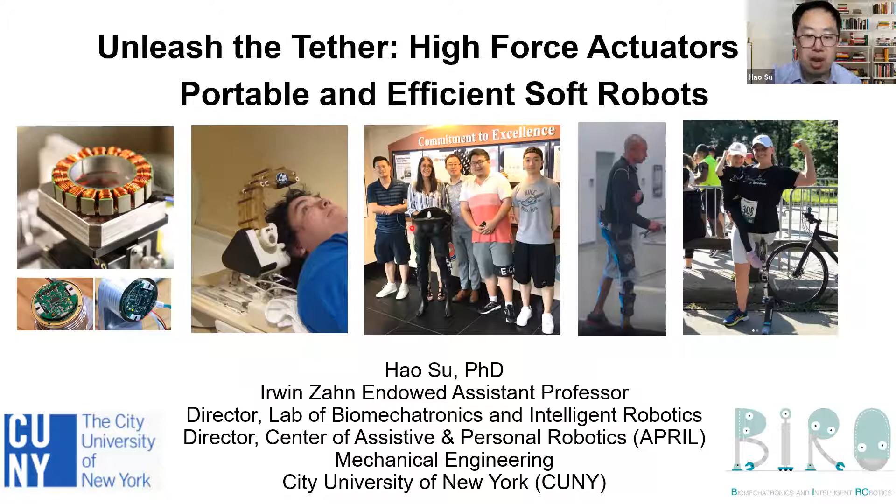Today, I would like to share with you our research that is at the intersection of robotics and medicine. Our lab focuses on design and control of high-performance robots with application in rehabilitation and surgery. This is a truly fascinating and emerging field that involves much fundamental research and exciting applications to solve real-world problems.

In the last decade, we have made significant progress in information technology. The smartphone is ubiquitous, which is the interface between the cyber world and the human. But there are limited systems that can deliver physical service. I envision robots will be the new interface between humans and the physical world to augment people for various tasks, from elderly care, manufacturing, to construction, disaster response, and many others.

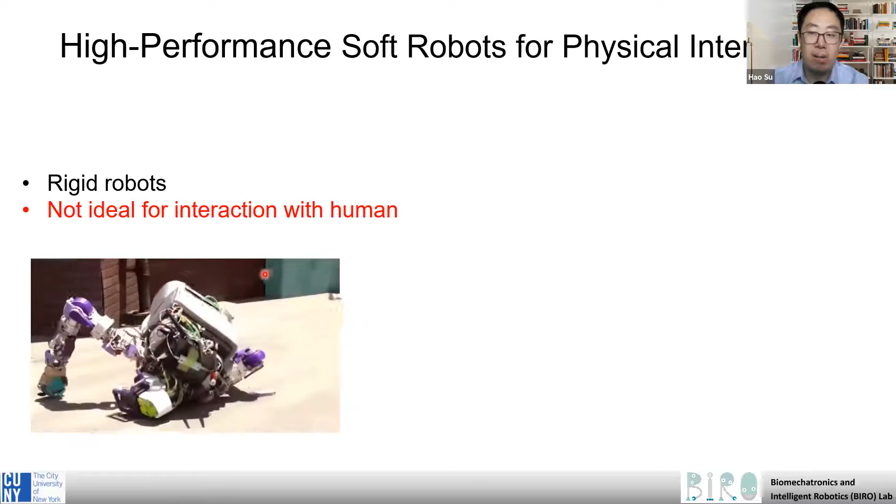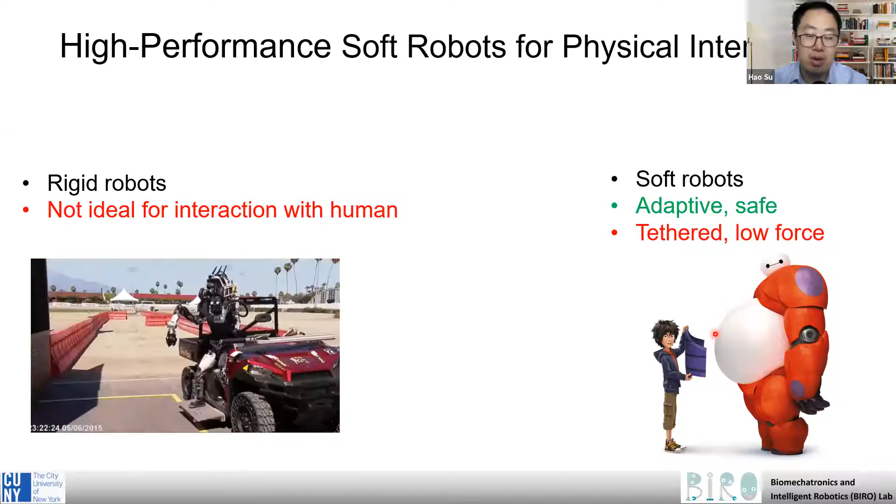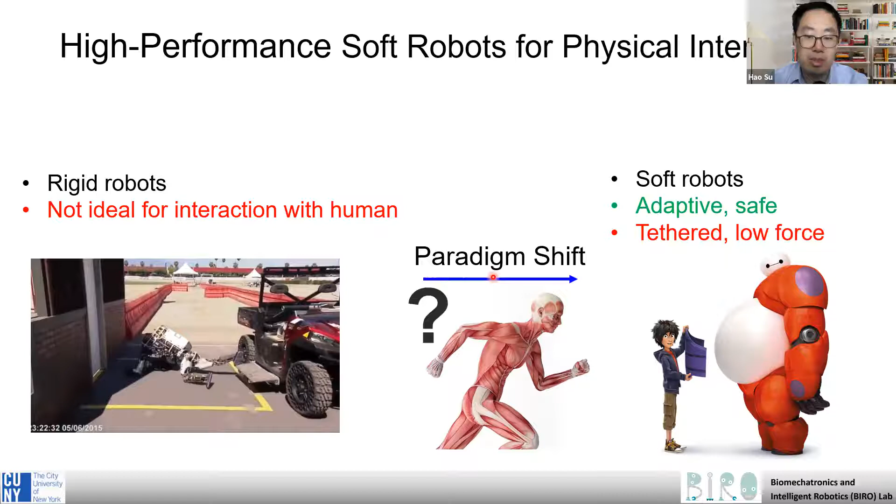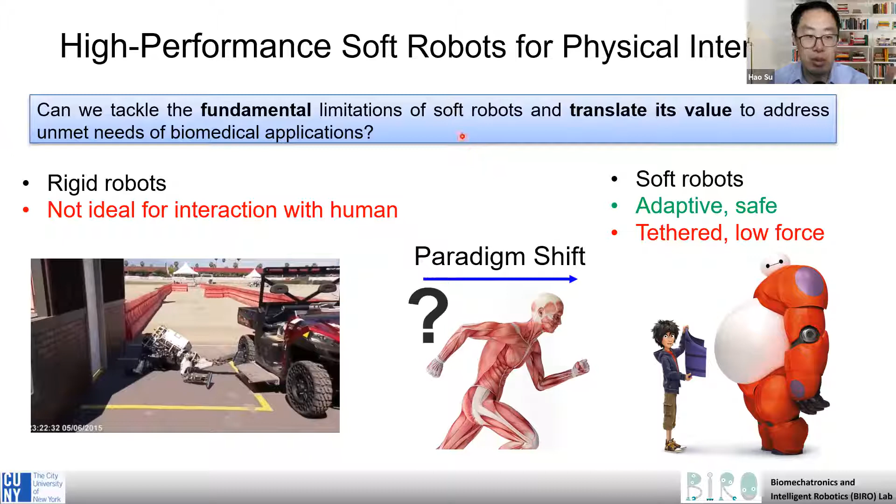State-of-the-art robotic systems are primarily rigid and operate on position control. They are highly precise, but terrible for physical interaction. Our research aims to design and control soft robots for physical collaboration with humans in ubiquitous settings. The question we are looking for answers to is what kind of design and control solutions can enable this paradigm shift? In particular, we are very interested in the fundamental limitations of robots, in particular soft robots, and how we can translate these technical innovations to address the unmet needs of biomedical applications.

Our multidisciplinary team is composed of talents from 4 research areas, including mechanical engineering, like Antonio, he's from University of Pisa, electrical engineering, control, and biomechanics. Our clinical collaborators are also leading experts in biomedical science. I also established the Center of Assistive and Personal Robotics, the APRIL Center, that is composed of 9 faculty from New York University, Rutgers University, and the University of Texas Medical Center.

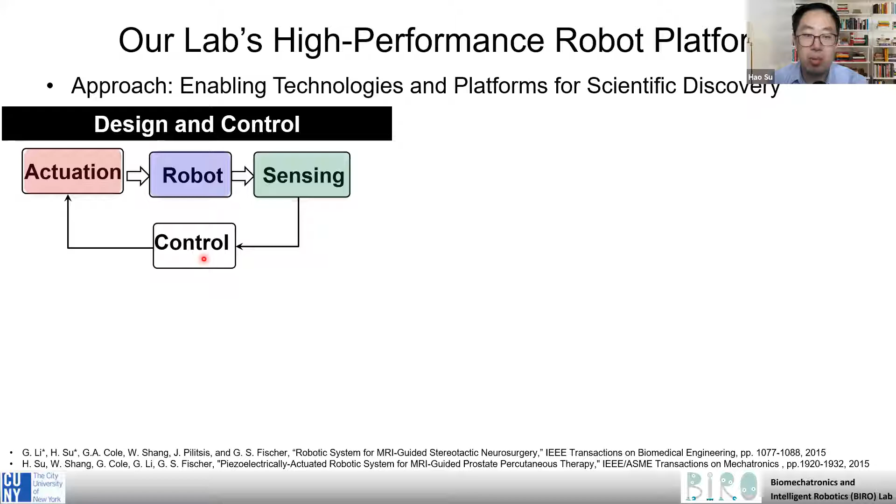In my lab, we focus on 2 domains. On the left, one domain is robotics, where we study design and control. Our approach is unique as we create component technologies like sensors and actuators. We also design robots from scratch, and then we develop controllers to embody intelligent robots. On the right, the other domain is scientific discovery. We use robots as a tool to address unmet needs in medicine, both in surgery and rehabilitation. We want to leverage robots to understand medicine and biology.

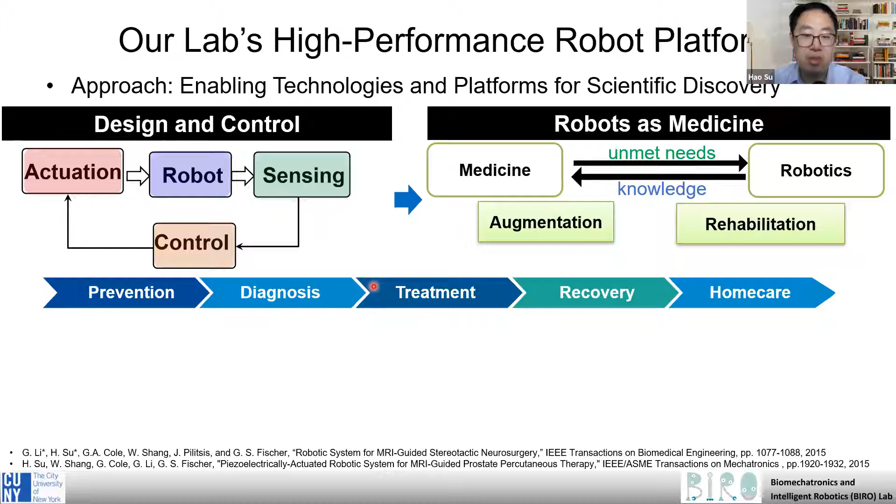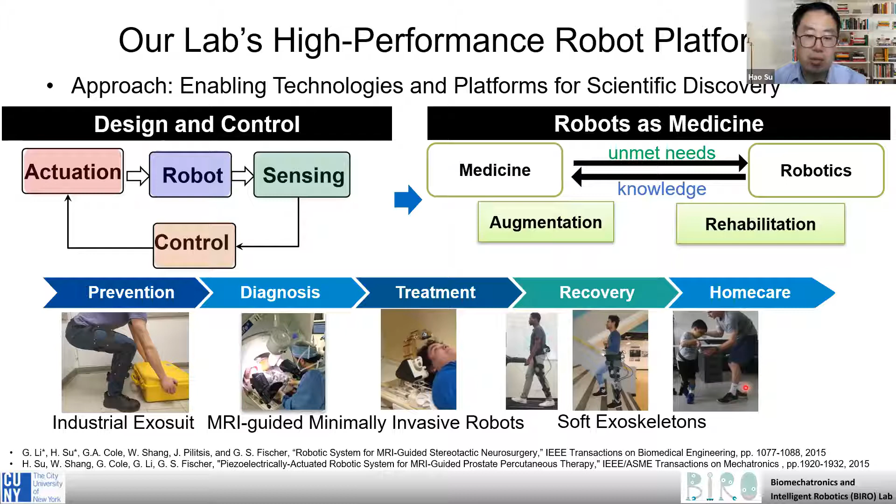In my lab, we have developed multiple high-performance robot platforms in the continuum of care, ranging from soft exosuits for musculoskeletal injury prevention to MRI-compatible minimally invasive surgical robots for cancer diagnosis and neurosurgical procedures. Those are essentially continuum concentric tube robots. In the last 4 years, we have been focusing on wearable robots for home-based rehabilitation with application in pediatric rehabilitation and also for musculoskeletal disorders like knee osteoarthritis.

Specifically, we have developed several key enabling technologies, including really lightweight motors, high-speed soft actuators and high-force soft actuators. Leveraging those components, we have designed what we think is the most lightweight powered exoskeleton, also with controllers to assist real-world locomotion. We believe that those innovations will enable a paradigm shift of assistive robots from clinic-based to home-based rehabilitation tools.

We have shown that our lightweight robot is able to significantly reduce energetics during human walking. In addition, we have some promising results to demonstrate that robots could be medicine, for example, to reduce pain of people with knee osteoarthritis and also improve mobility for children with cerebral palsy.

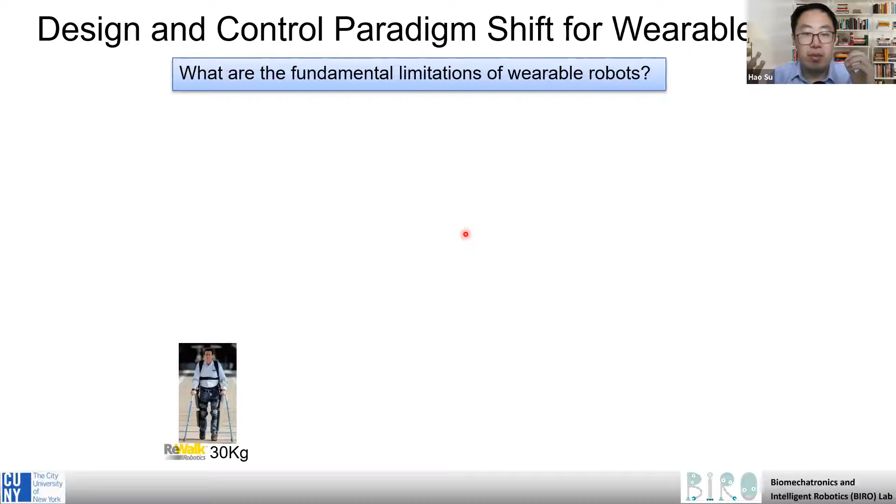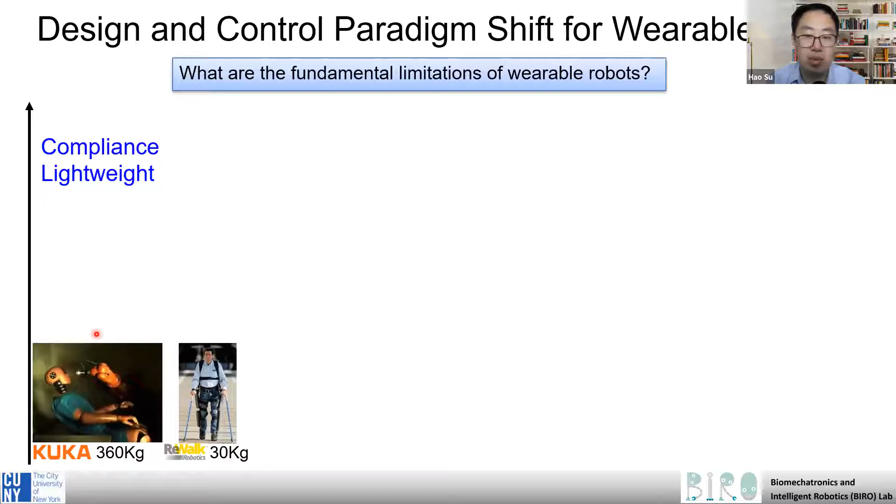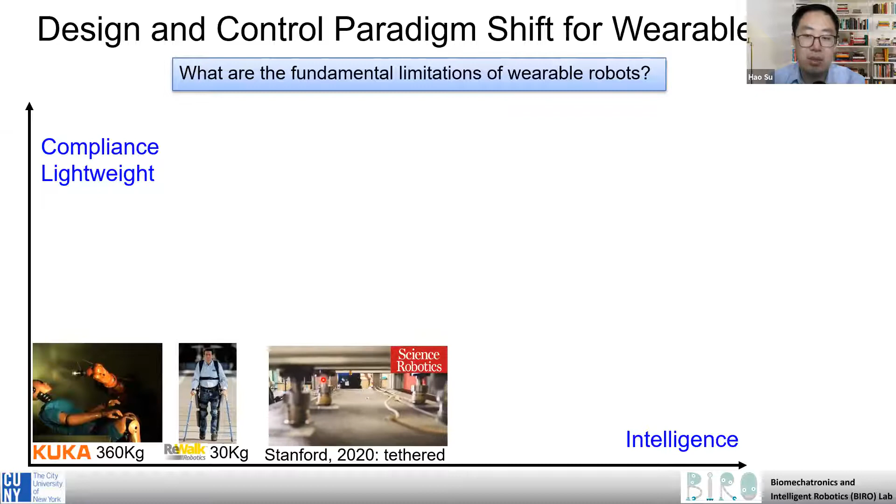Generally, if we observe robots through the lens of design and control, in terms of compliance and lightweight, the design approach of many state-of-the-art exoskeletons has no difference with industrial robots that are heavy, rigid, non-compliant, and even dangerous. In terms of intelligence, researchers developed wearable robots that can assist human running in addition to walking assistance. But many systems are still tethered and cannot be used for community settings.

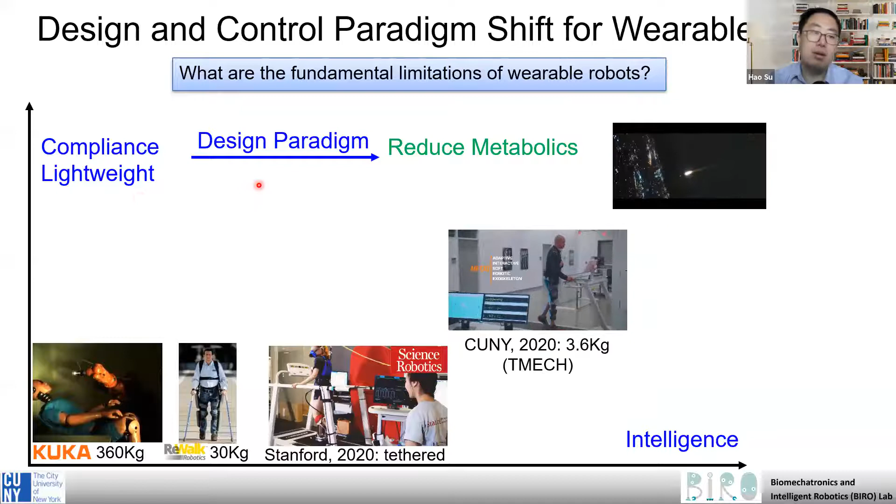In my lab, we aim to develop a really lightweight powered exoskeleton to minimize the mass penalty of wearable robots. We seek new design solutions to make a robot really lightweight and compliant. And the design objective is to reduce metabolics. Of course, for wearable robots, there are many other metrics in addition to metabolics, like muscle activities, but metabolics is certainly one key metric in this community.

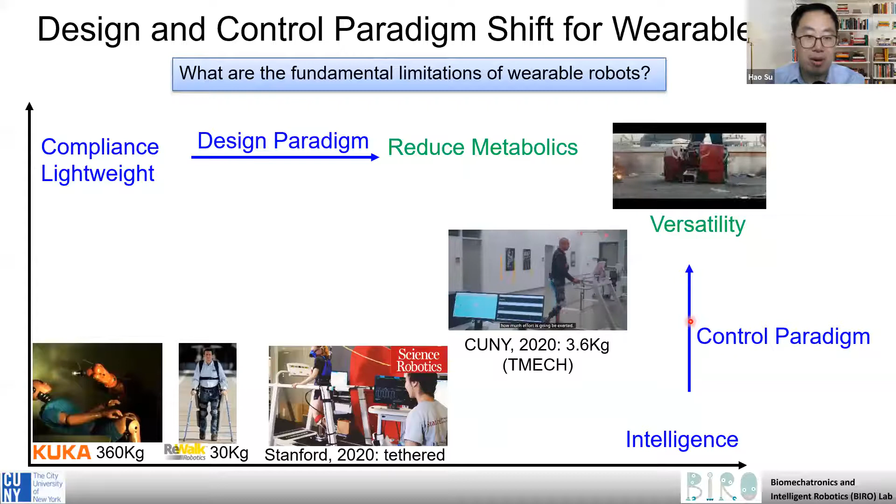If you look at the other dimension in terms of control, we want to develop controllers that can assist versatile activities. It's not only for walking, as many state-of-the-art robots focus on, but also for many other irregular gaits or irregular activities.

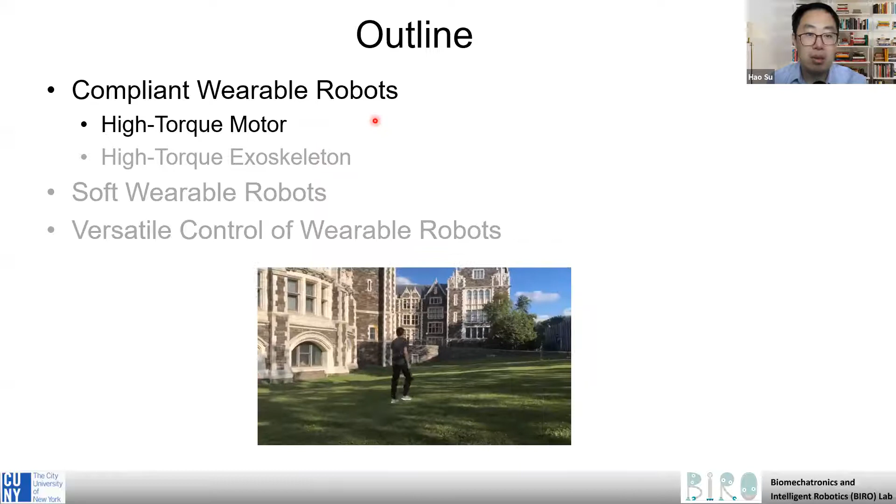In today's talk, I will cover 3 topics. The first one is a compliant robot, in particular, this untethered compliant wearable robot. Then I will present soft material wearable robots. For the third topic, I will share with you our control research, namely versatile controller for multimodal locomotion assistance. Let's start from the first topic about compliant wearable robots and why we want to work on these high torque motors and high torque exoskeletons.

Our robot development process always starts from understanding the unmet needs in medicine. In this case, it's biomechanics. Human locomotion is actually a complicated process that involves coordination of multiple limbs. As you can see from this diagram, the x-axis is a gait cycle from 0% to 100% of a single stride. The vertical axis is the ankle joint moment.

And you can see a unique feature is that human walking requires high torque. The ankle joint generates about 120 Newton meter torque in about 200 to 300 milliseconds. Even if we provide partial assistance, let's say 30% assistance, the actuator is required to generate about 40 Newton meter torque.

Right? If we look at the bottom right diagram, this is the torque speed profile of a human ankle joint, and the exoskeleton that provides partial assistance is located here, right? However, a conventional actuator typically can only produce about 0.5 Newton meter. So you can see the large discrepancy between the requirement and the motor performance. This is more than 100 times the capability of a conventional motor for wearable robot applications.

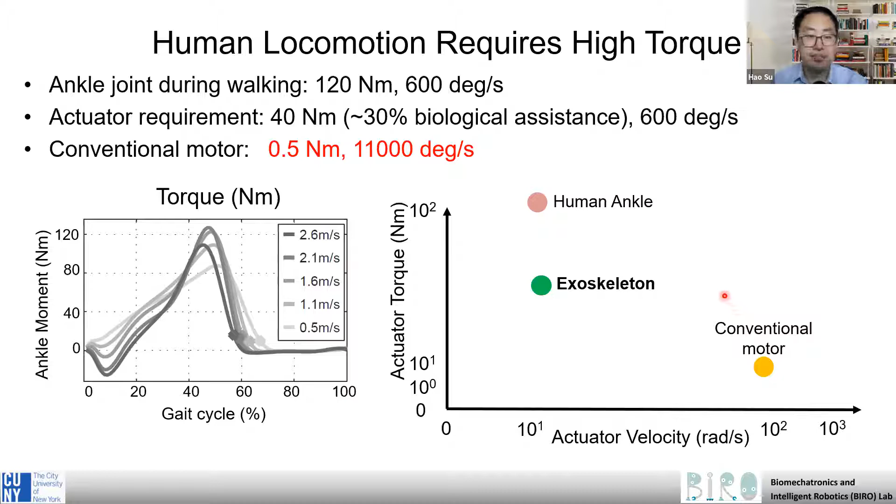So how can we tackle this problem? We follow a very interesting thinking philosophy. It's called first principle based thinking. Essentially, it's a physics way of looking at the world. You boil things down to the most fundamental truths so that we can tackle these fundamental limitations and tackle the overall problem.

For example, before we started the robot development, I asked ourselves, what are the first principles that limit the performance of wearable robots? If you look at the anatomy of a powered exoskeleton, it's composed of a motor, gear, typically high ratio gears, and wearable structure. And those high ratio gears, typically around 200 to 1 or 300 to 1 gear ratio, result in high friction and high inertia of the robot. Thus, most wearable robots are actually resistive to natural movement, in particular when unpowered.

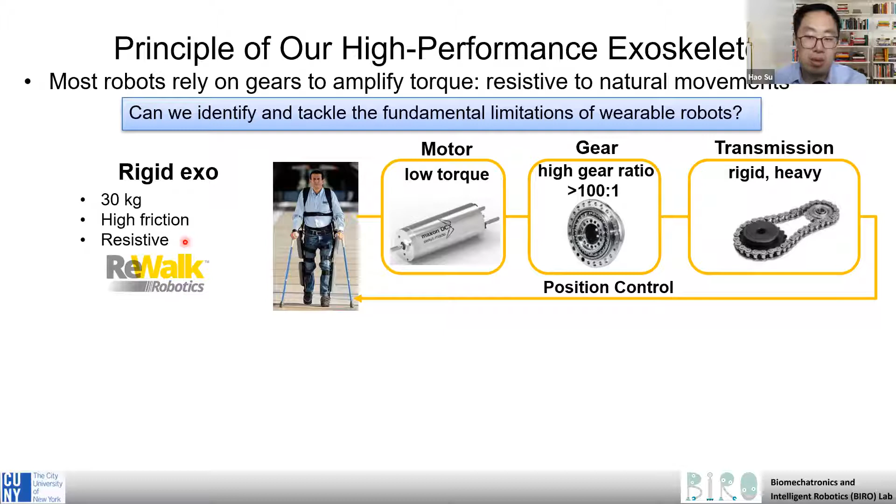Our exoskeleton aims to make the robot not only lightweight, but also compliant and truly assistive to human movement. We have a holistic solution from high torque motor to low ratio gear and different transmission mechanisms, from rigid transmission to soft transmission.

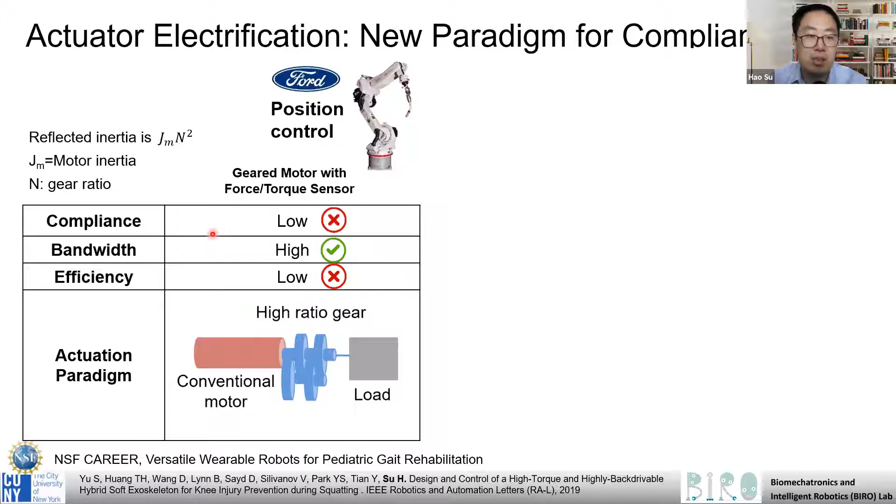Similar to the revolution in the automotive industry, my lab has been working on actuator electrification research for robots. If you look at the 3 metrics to quantify collaborative robots, including compliance, bandwidth, and efficiency, conventional actuators have high bandwidth, but are very rigid and suffer from low efficiency and low compliance. Series elastic actuator is still kind of the state-of-the-art solution; it can improve compliance by the addition of a mechanical spring between transmission and the load, right? But it has mediocre bandwidth and efficiency.

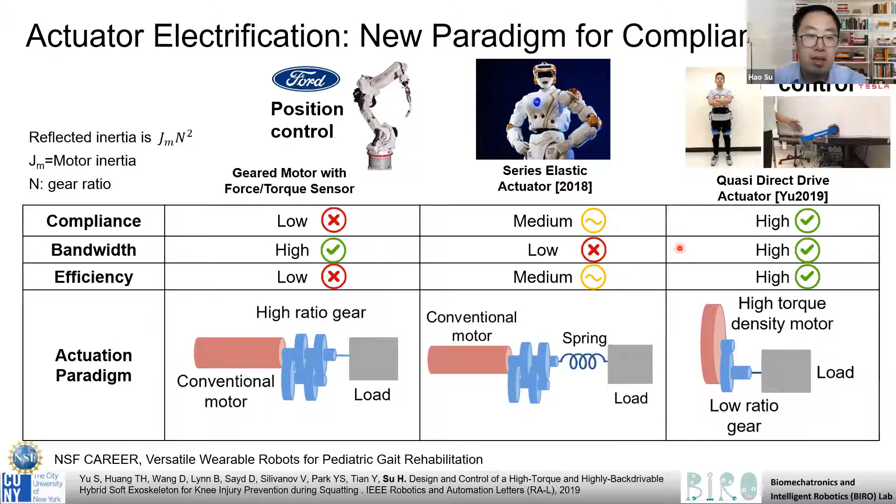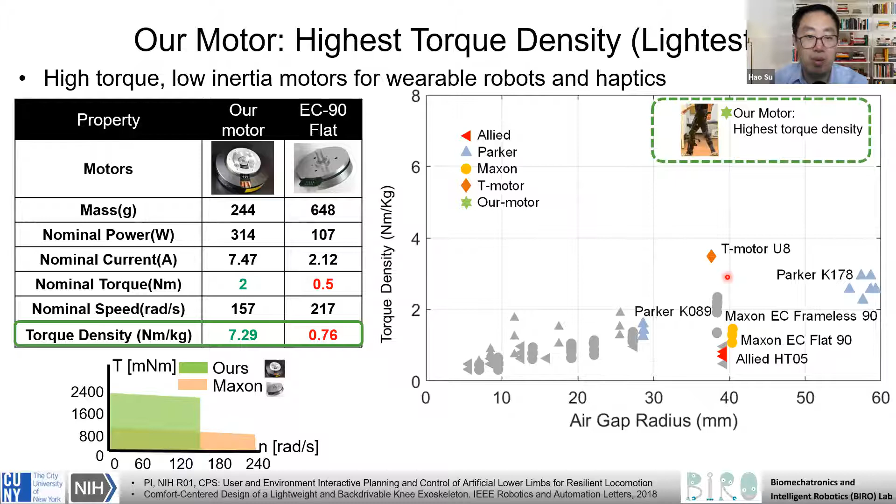As shown in the bottom left figure, our motor is more similar to human motion characteristics, higher torque and lower speed. It generates large torque and relatively lower speed. If you look at the diagram on the right, our motor not only has better performance than conventional Maxon motors, but also has higher torque density than some of those drone motors. For example, this T-Motor has been used widely for robots by MIT and many other groups.

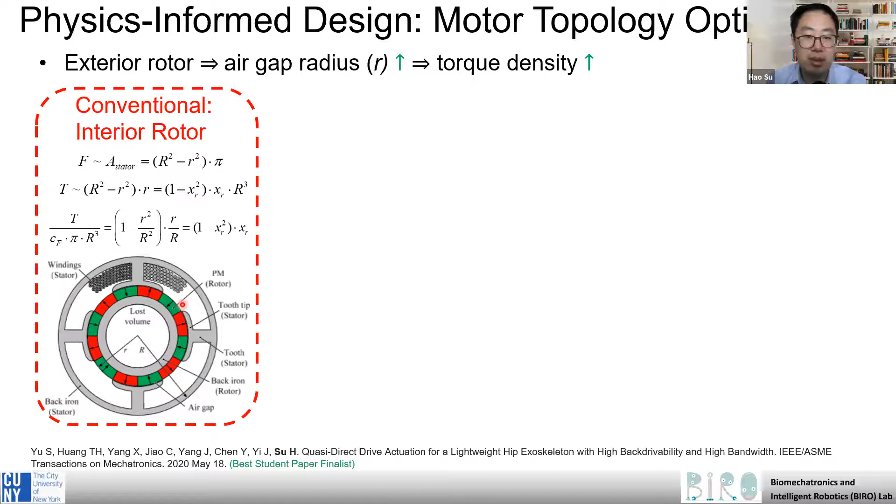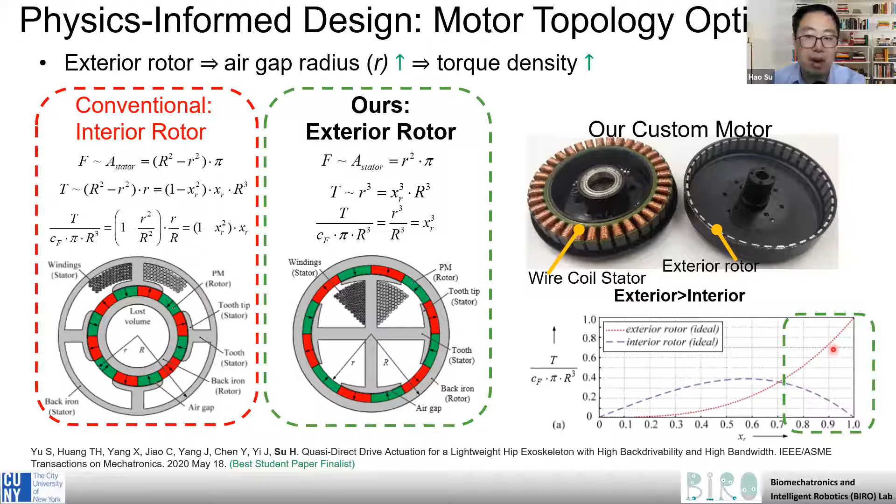To achieve those performances, we developed 2 physics-informed design methods. The first method is motor topology optimization. Instead of a conventional motor that is based on interior rotor design, we create an exterior rotor topology, shown as this colored circle. If you look at the diagram on the bottom right, this exterior rotor topology can produce a higher torque density than interior rotor design.

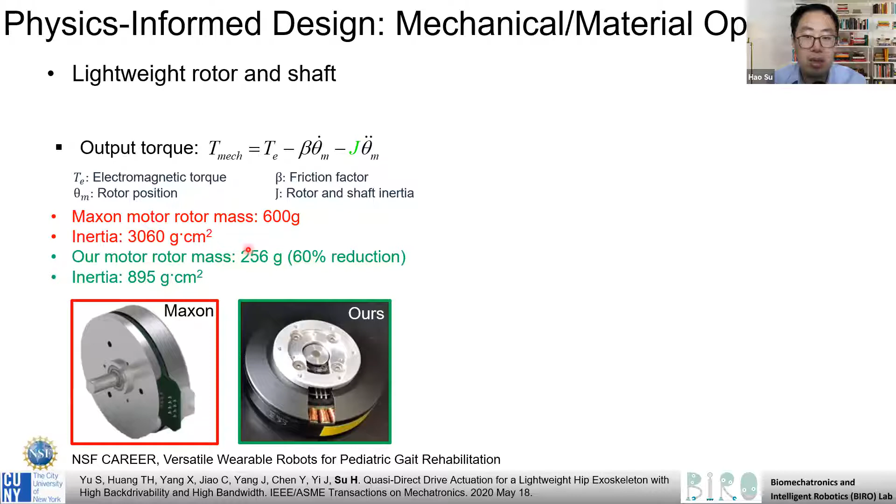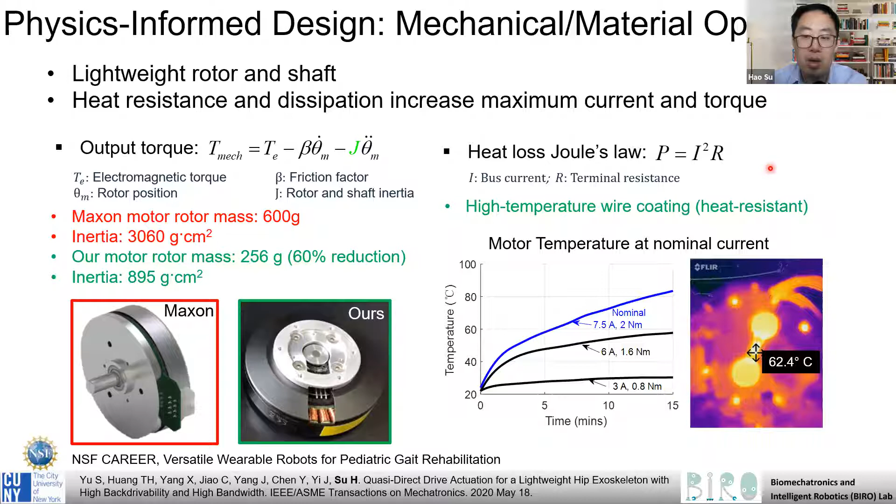The second method we developed is mechanical and material optimization. We are able to reduce the rotor mass by 60%. In addition, we also figured out some high temperature wire coating methods, so the motor can operate at the nominal torque while the highest temperature is still fairly low.

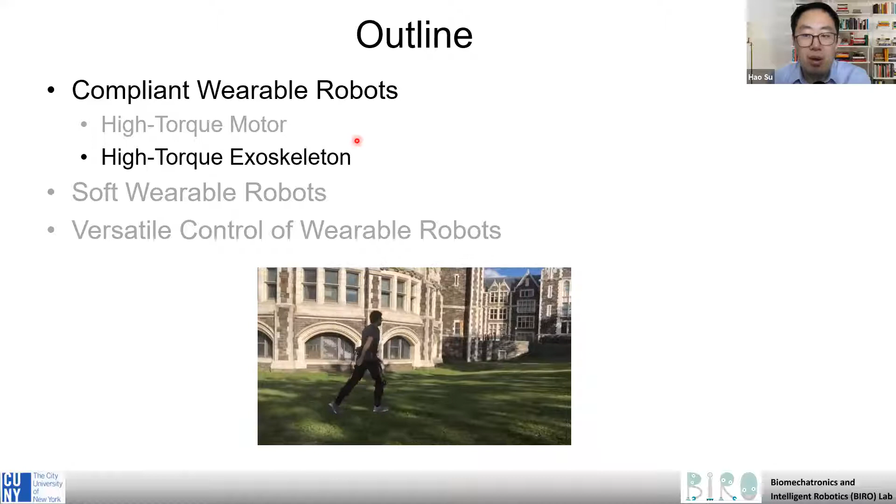In addition to the first principle based motor design, we also leverage mechanical design to develop a lightweight robot. Our robot is lightweight not only because of the high torque density motor, which is essentially a lightweight motor, but also because of the simple mechanical design. If you recall the slides about SEA, series elastic actuator, to add the spring it requires a very complicated mechanical structure. So the overall system is complicated and in general heavy and bulky.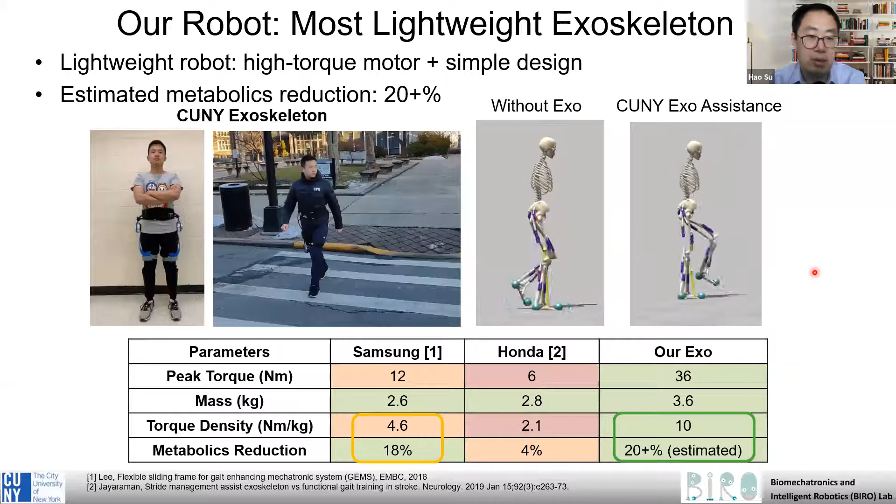In addition to this portable robot, we also designed some tethered robots to further minimize the wearable mass, right? We can isolate the actuator from the person, so the person only needs to bear the mass of the wearable structure. Because if the robot is too heavy, it significantly increases the metabolic penalty to the person. This is a robot from Humotech. It's a tethered system, a spin-off company from Carnegie Mellon University. They are based on an AC motor, and the wearable structure is heavy, about 7 kilograms for one hip exoskeleton. And they can generate a really significant amount of torque to a person.

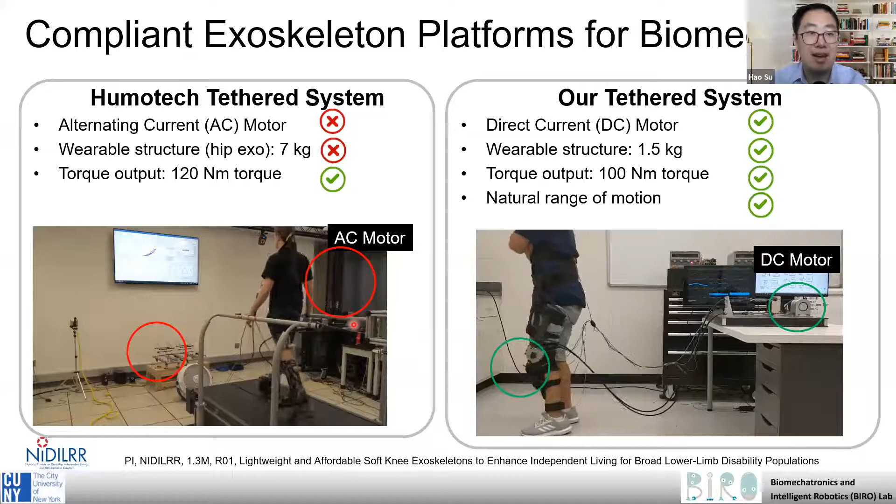In our design approach, we want to use a DC motor because it's much smaller and much more affordable. And the wearable structure we designed is also pretty lightweight, about 1.5 kilograms. Though our torque is slightly less, it can already generate more than 80% of torque for most tasks. One key feature is that this robot still allows natural range of motion, because some tethered exoskeletons don't really allow the natural range of motion for movements like squatting or stair climbing.

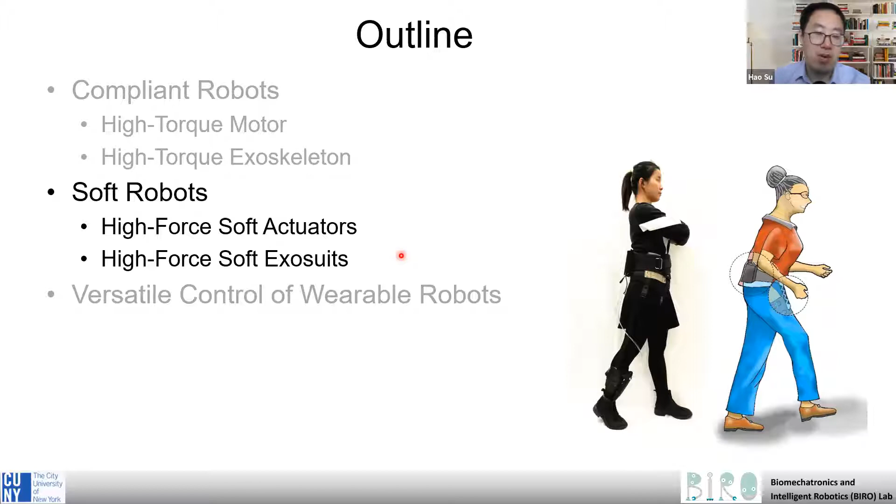In addition to these compliant robots, which you can see are structure-based soft robots, right, we also work on soft material robots through soft actuator design to achieve high force, and we also developed soft exosuits with high force in an untethered manner. The previous robots I just presented are compliant, but their materials are not soft.

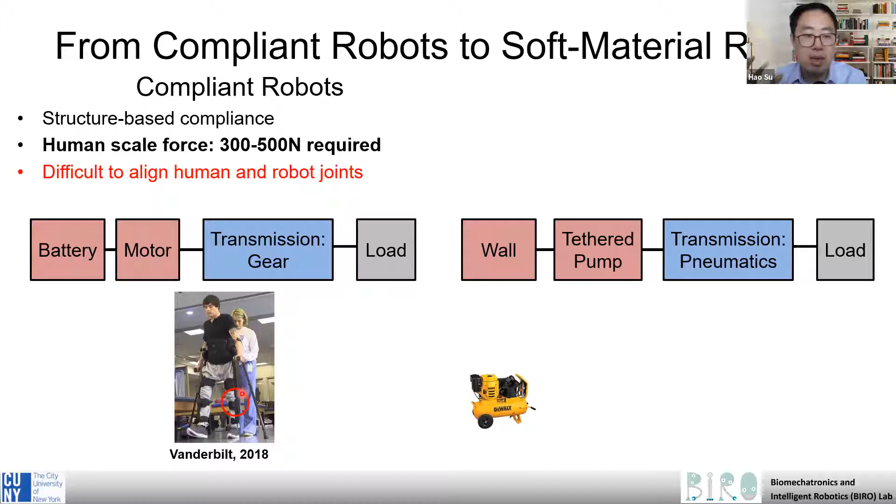It still has rigid joints that cause misalignment issues between human and robot, as shown here, right? So joint misalignment is a key limitation of rigid wearable robots. Soft material robots that use soft materials like rubber and fabric are very suitable for wearable applications because there's no joint for those robots. So there's no joint misalignment issue as with a rigid robot.

But fluid-driven soft robots typically have low forces, and they require a heavy tethered pump to generate the fluid. Actually, from a mechanical design perspective, if we think about the energy transmission from a tethered pump to a pneumatics mechanism, I consider pneumatics a transmission, and this pump is actually a very important component of the actuator because it converts electrical energy to mechanical energy, right? So this pump is actually a very important component of the actuator.

From this perspective, we consider motor and pump limitations, not only the pneumatics or hydraulics structure itself. Because many fluid-driven soft robots are tethered, to unleash the tether, the key objective is to design high torque density and high efficiency robot components. Our method is actuator electrification for soft robots, in this case, soft material robots.

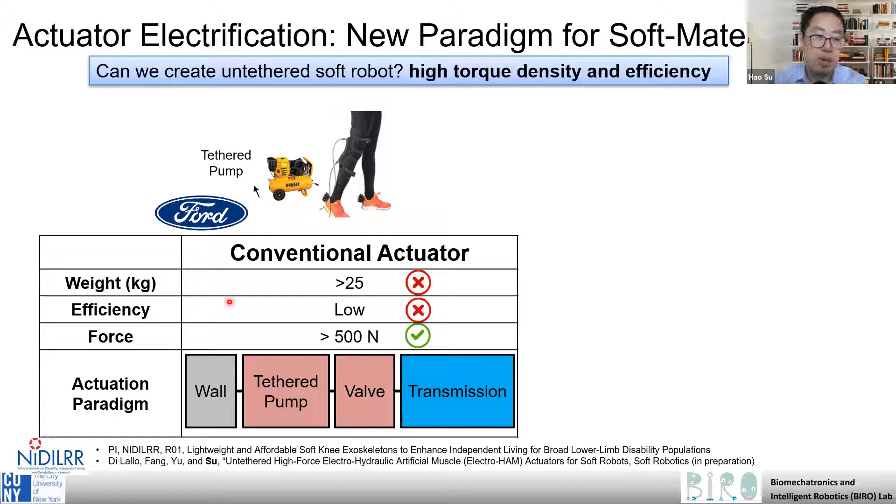When we started our design process, it really puzzled me whether it's possible to generate human scale forces in a portable manner, right? For example, for wearable robots, if you think about the exoskeleton, it requires at least around 300 Newton to 500 Newton force. That's really a significant amount of energy from this actuator.

In the last 3 years, we figured out an electro-hydraulic solution. We need to design and customize a lot of mechatronic components, including motors, magnetic pumps, and electronics, to enable this electro-hydraulic actuator solution. To convert motor motion to fluid actuation, the pump is very important. To improve the system efficiency, we developed some custom pumps.

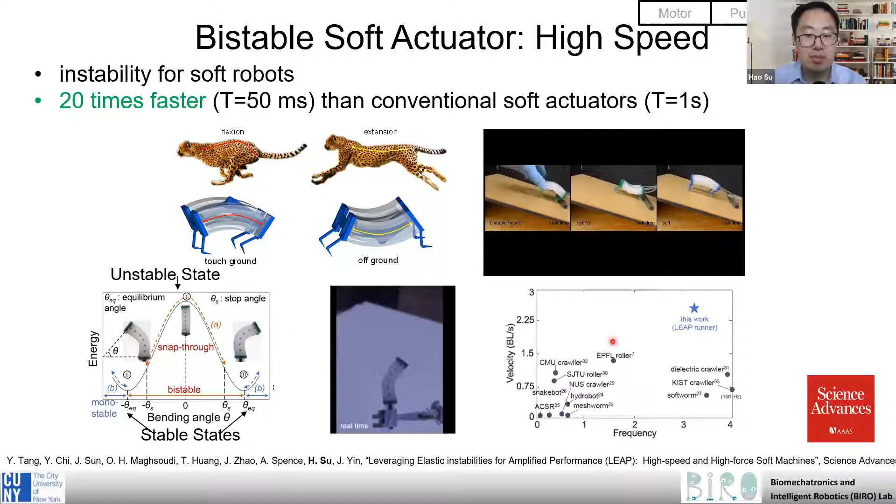And you can see from the bottom figure here, the robot has two stable states and one unstable state. It leverages this nonlinear phenomenon to rapidly switch between two states. The robot is able to amplify the actuation speed by 20 times compared to conventional actuators, and it produces a high-speed running or crawling soft robot. The same principle can also be used to design high-speed underwater robots.

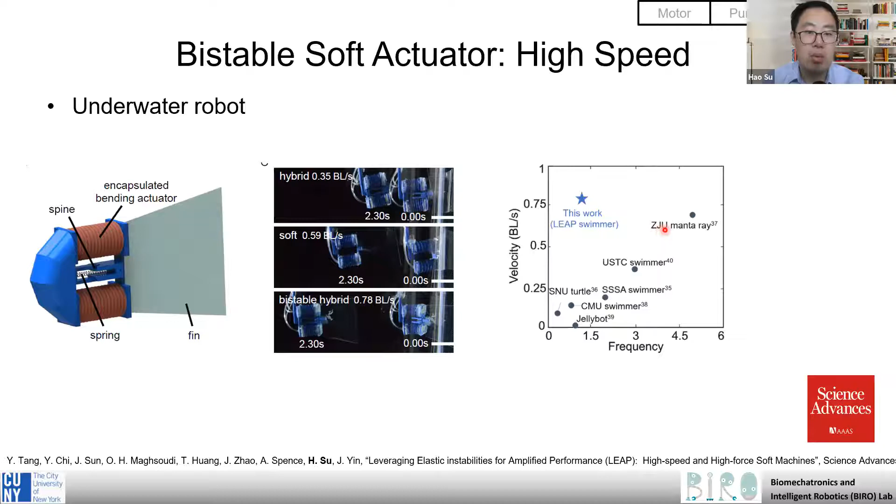And the stiffness can be modulated to high stiffness to grasp heavy objects, or low stiffness to handle fragile objects. It's very suitable for manufacturing and assembly applications.

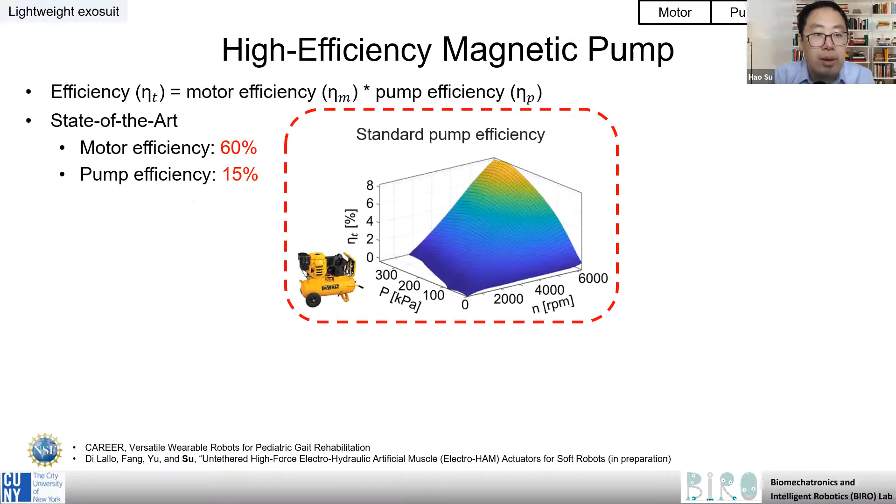Yes, please. So you say that 500 Newton is required in the couple of slides before. I didn't understand how it was calculated or how it is a target. The second one is, in the pneumatic actuation, you showed the air pump, but maybe I missed that point. You're eliminating the air pump source and then using the magnetic pump for the pneumatic systems, or if I understood wrong? Yeah, those are two really good questions.

I think the torque requirement, right? If you think about the lower limb, there are 3 joints: hip joint, knee joint, and ankle. Overall, the ankle joint has the highest torque requirement, at least about 100 Newton meters. We provide partial assistance, because full 100% assistance is more for people who are fully paralyzed. In our case, many people, like people with stroke or knee musculoskeletal disorders, only require partial assistance. So 100% assistance is too heavy.

So if you calculate the torque, let's say 100 Newton meters multiplied by 30%, it's at least 30 Newton meters. But this is a range; some people want to assist 50%, and it depends on different joints and percentages. Take the ankle at 30 Newton meters and divide it by the moment arm. Actually, ankle exoskeletons from several universities using the cable solution generate 700 Newton. So if you want to provide lower level assistance, I think it's around at least 300.

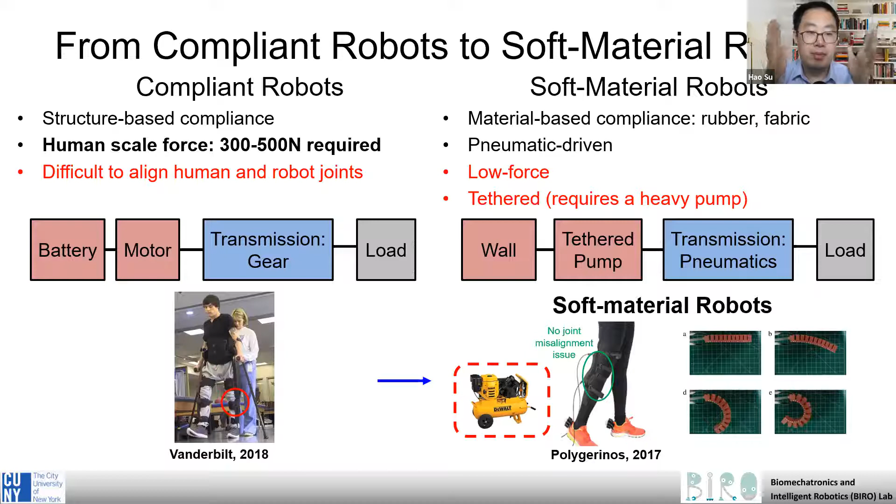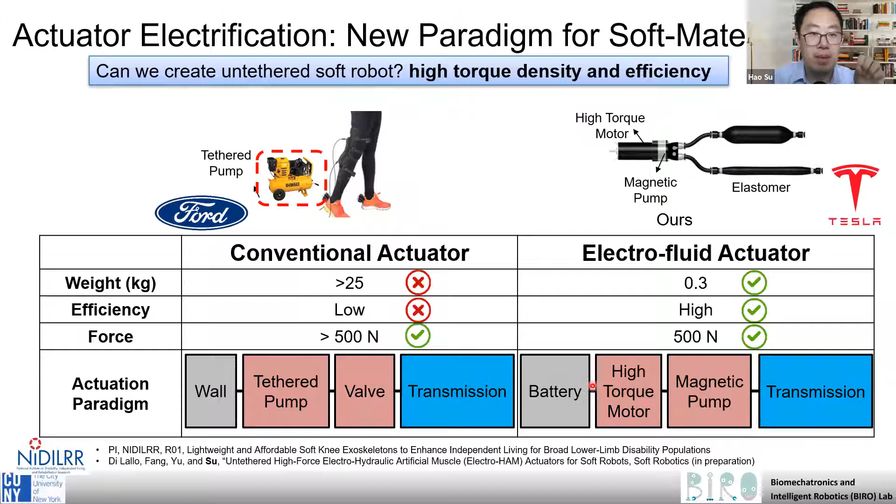As for the second question, that's also a really good question. We want to be different from the first solution based on a tethered pump. We want to get rid of this big pump, and we don't connect the tether to a wall. It's battery operated, and based on this motor and magnetic pump system. This is the system structure, roughly as you can see from this diagram, so it's a compact solution.

Yes, and you also use it for hydraulic actuation, because researchers usually don't prefer hydraulics, since conventional hydraulic systems create problems with high forces, maintenance and so on, from literature surveys. So you also solve this problem, I think. Certainly. Pneumatics and hydraulics both have pros and cons. And I think the unique opportunity for general fluid-driven robots for wearable applications is here, because if we think about high force, right?

Actually, it's not very difficult to design some high force actuator, right? Like this from Professor Suzumori's lab. It's really a nice, very cool hydraulic actuator, right? But for this portable application, this presents some unique challenge, but also unique opportunity, right? And I think in this space, it has a high force, but also to make that portable, it's really something pretty unique, right?

Because, for example, this one is also a famous robot from University of Colorado, right? But generally, it's a little bit kind of like a low force end. It's not really designed for wearable application. For this grasping, this kind of actuator is good. But for exoskeleton, this is really a big challenge. Even for us, it's very, very difficult to design a high force and portable actuator.

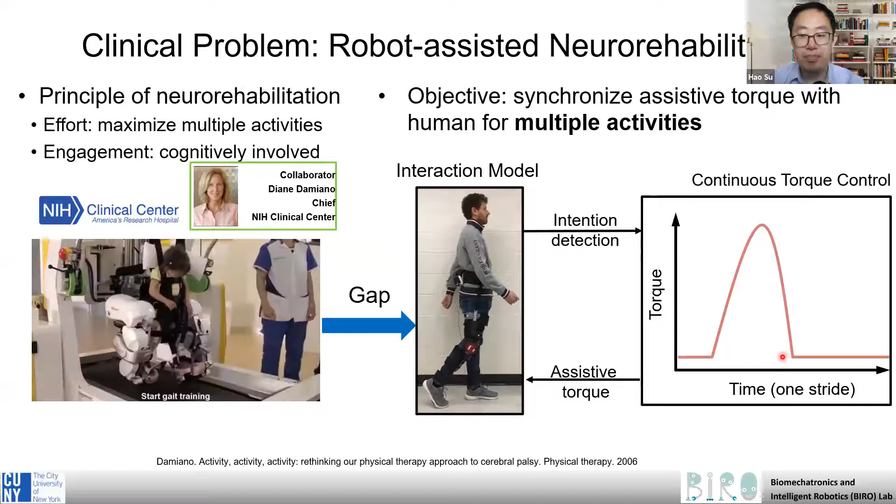Our design objective for the controller is to develop synchronized assistive torque with the human for multiple activities. For a single joint, we want to come up with a torque assistance profile that can really synchronize with the human activities. To this end, we have two tasks. The first is to model the human-robot interaction and to understand the robot's impact on the human. The second is to figure out this torque profile. We developed a unified model that can capture the dynamics of motor, transmission, and wearable structure. From this dynamic model, we are able to understand the property of different actuation paradigms.

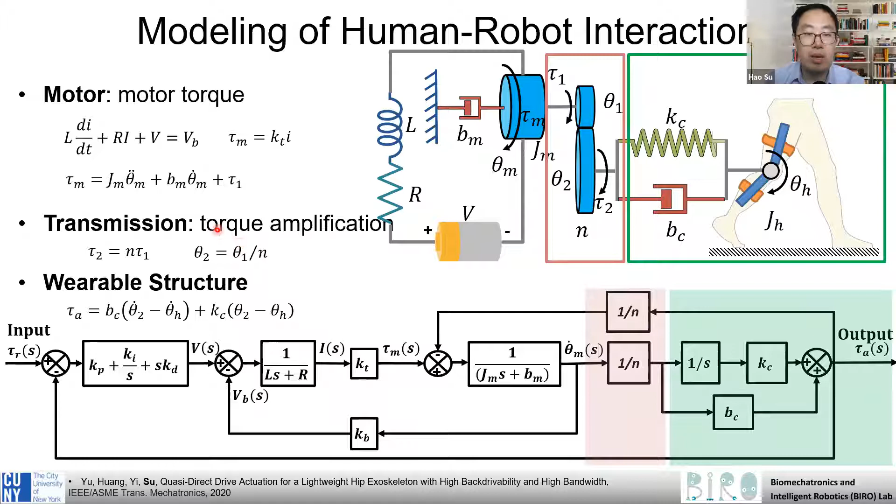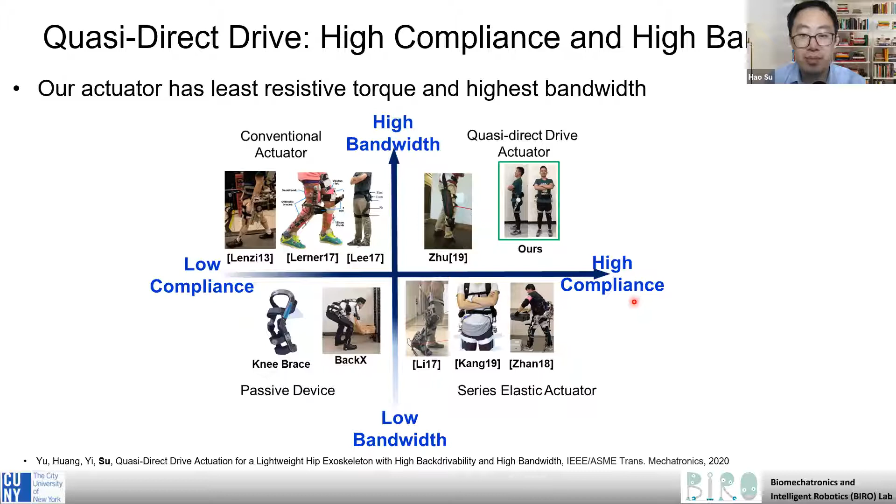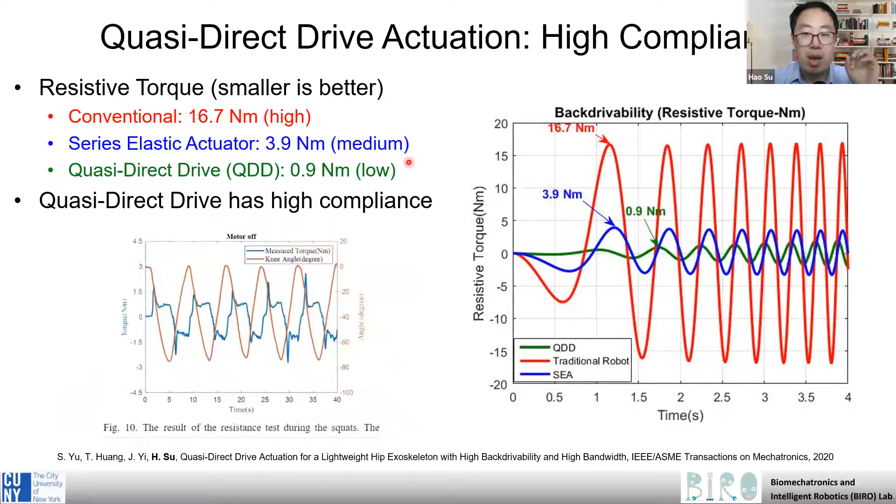From this modeling and experiments, we found that our actuator has both high compliance and high bandwidth. In this case, I'm talking about the quasi-direct drive actuation, to achieve high bandwidth and high compliance. From both simulation and experiment, we found that the quasi-direct drive actuator is able to overcome the limitation of conventional actuators and the series elastic actuator. The QDD actuator demonstrated high compliance. Using the QDD actuator, we also designed a cable-driven, kind of soft robot actuation, and it also has high compliance.

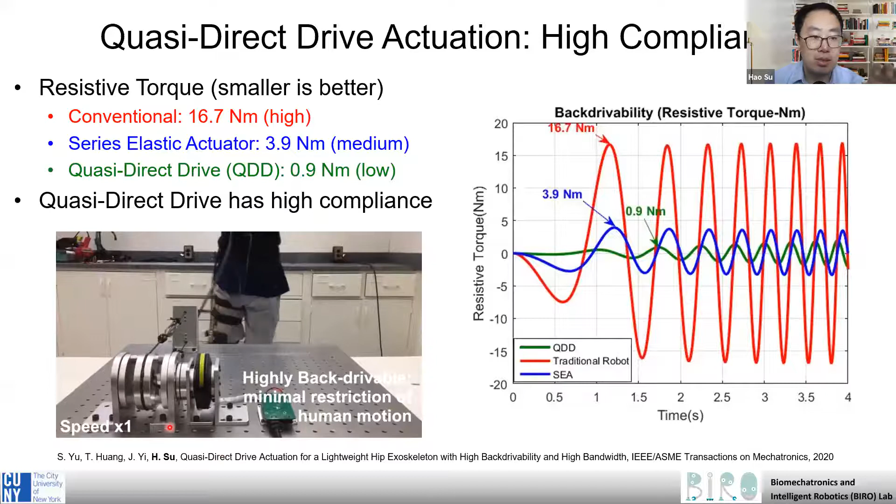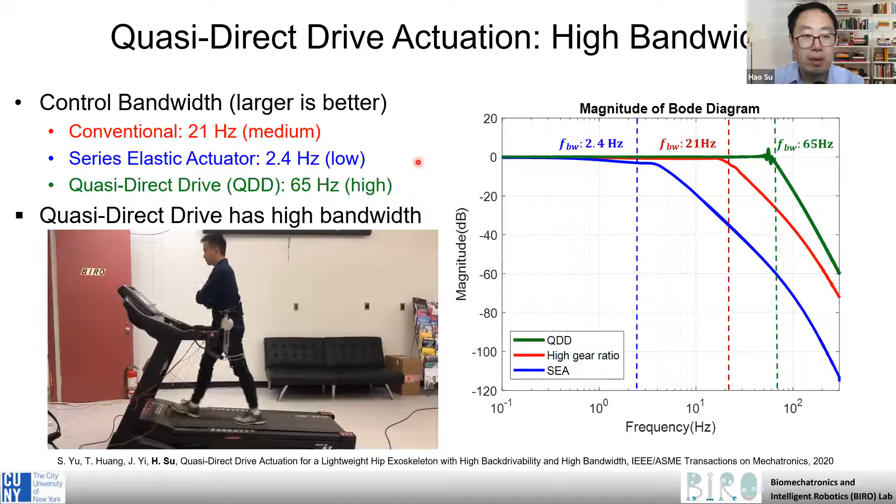In terms of bandwidth, we found that the series elastic actuator has to compromise the bandwidth to ensure compliance because of the spring mechanism, while quasi-direct drive is superior in terms of bandwidth. High bandwidth makes wearable robots more responsive and capable of handling unexpected events. So quasi-direct drive actuation really can ensure both high bandwidth and high compliance. Our cable-driven quasi-direct drive actuator achieved really good tracking accuracy, and we also showed that we can reduce about 75% of muscle activities during squatting.

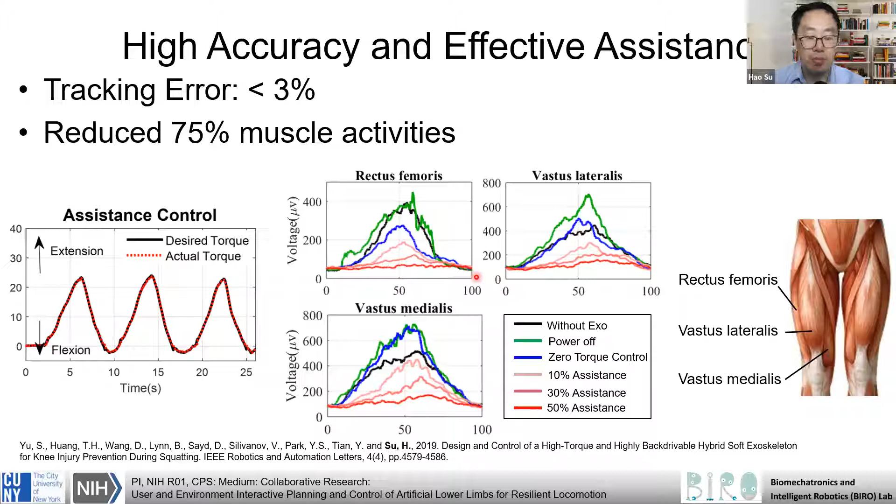When we think about how to use those robots, many wearable robots are designed for neurological disorders like spinal cord injury and stroke, because those individuals generally have more severe gait impairments and are more willing to tolerate the mass penalty of wearable robots. We have been working on different applications, like musculoskeletal disorders, like knee osteoarthritis.

The idea is to reduce the loading to relieve pain for people with knee osteoarthritis. We have obtained some very promising results, reducing about 80% of pain in 6 subjects. Their pain scale has been reduced from 9 to 1 to 2. So the smaller the better. We also showed that we can reduce the muscle activities of people during walking.

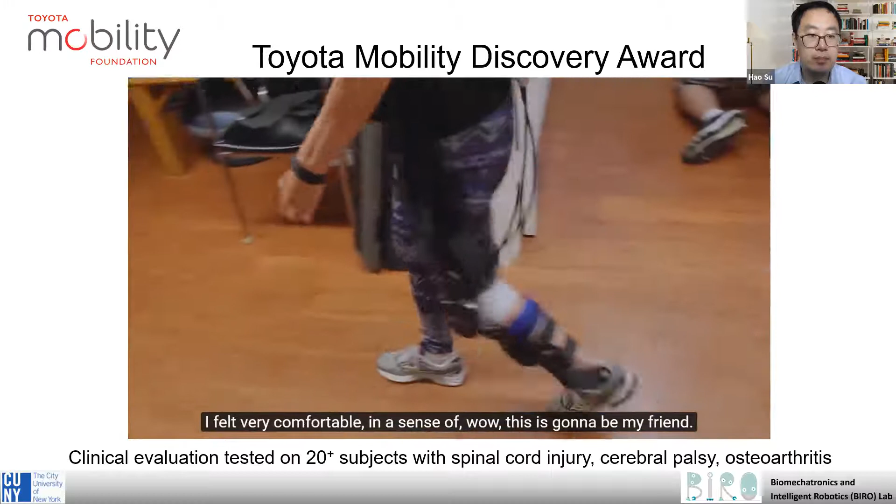Our team also won this Toyota Mobility Discovery Award using this cable-driven soft robot. Put this on, it actually helped me. I felt that I had more stability, it helped my balance, and my gait went very natural. I felt very comfortable in the sense of, wow, this is going to be my friend.

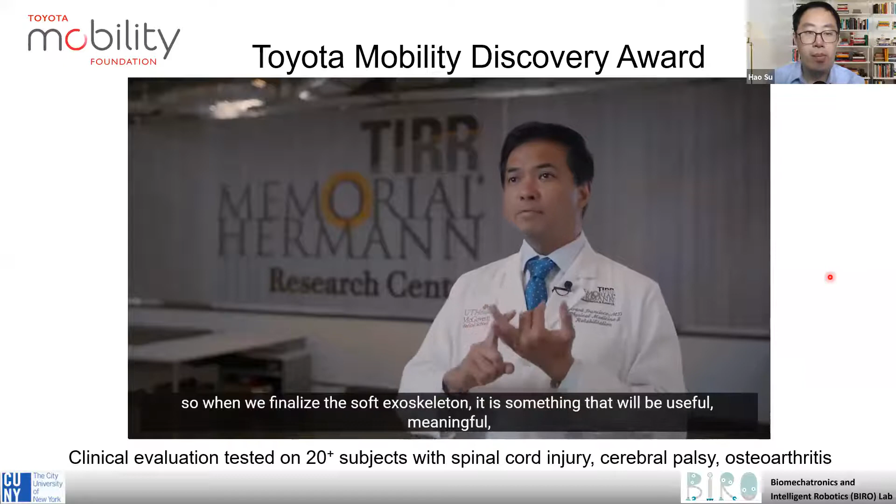I love it. It took about a minute because it's pretty easy. I'm walking a lot lighter. It's very low profile. I don't hear noise when I'm walking. Everyday use, this is perfect. They have to tell us what they need. They have to tell us what they want, so that when we finalize the soft exoskeleton, it is something that will be useful, meaningful, something that will help them in their recovery and their activities of daily living.

Another aspect of controller design is to develop continuous control methods. This continuous controller is important for wearable robot control, because if you look at this state-of-the-art controller, it uses a predefined piecewise torque profile. The x-axis is joint angle. The y-axis is torque. The torque profile is not smooth and susceptible to varying gaits.

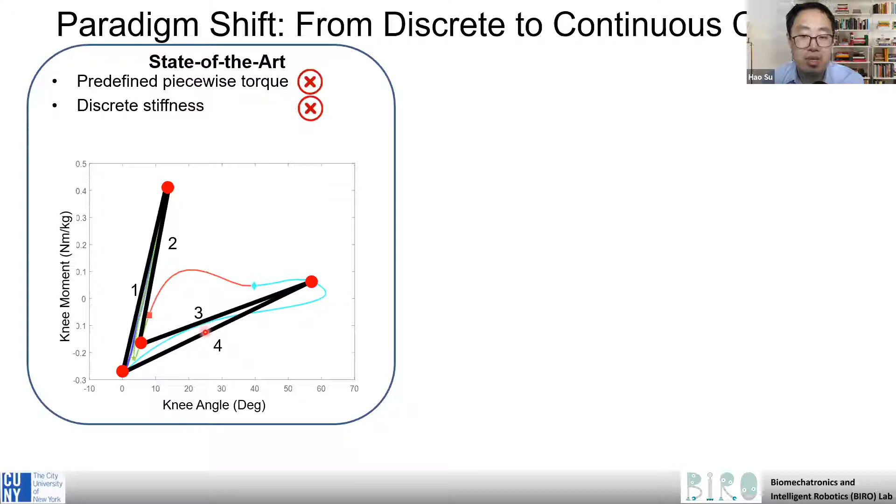And also there's no one-to-one mapping between joint kinematics and joint torque. So it has to rely on discrete gait detection, like finite state machine methods and discrete torque control. Our method is based on continuous detection of gait that produces a more robust and smoother assistive torque profile. In addition, it is able to produce one-to-one mapping between kinematics and estimated joint torque.

For a data set of 23 people, we figured out how to handle that massive data, as biomechanics produces a lot of data, including walking at different speeds, gait cycle, and many kinematic data, including joint angle, angular velocity, and joint torques.

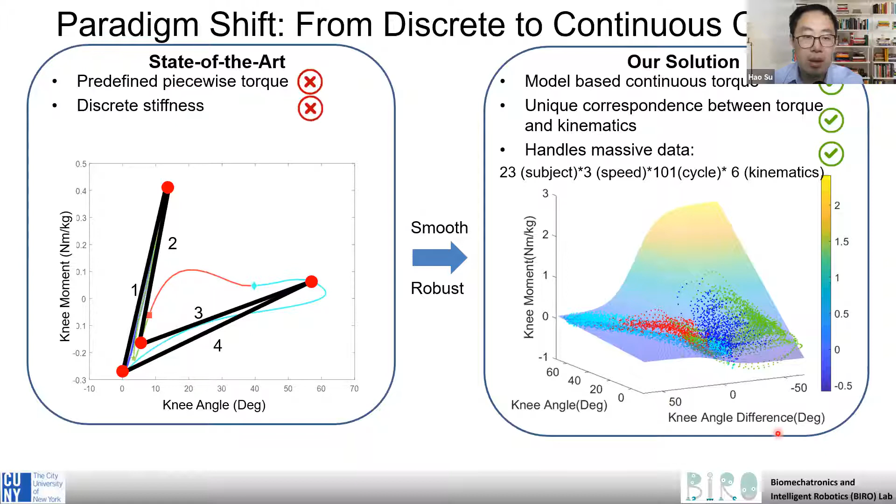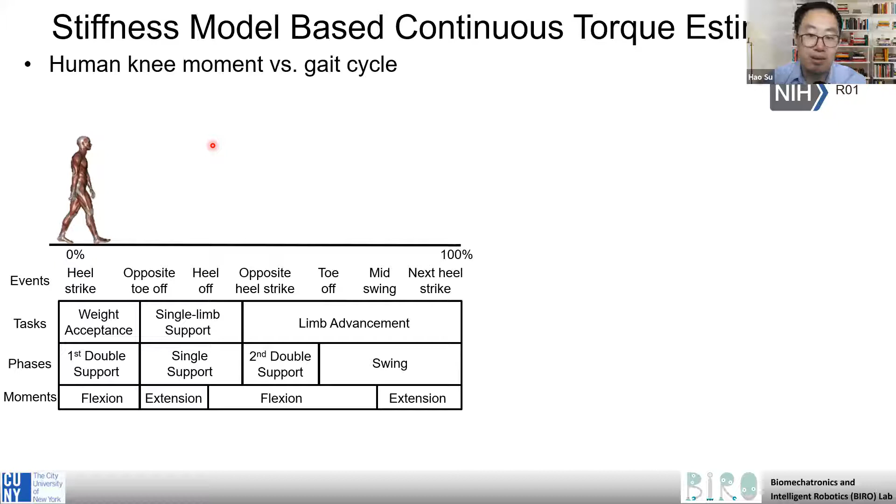To estimate the joint torque for real-time synchronized control, we want the robot torque to synchronize with the biological torque. We looked at the gait biomechanics, and it turned out that walking is still a complicated process, and we can separate it into 4 phases, including double support and single support. After the push-off phase, the gait goes into double support again, and finally the limb will be in swing phase. We observed that there are 2 dominant stiffness modes during the gait cycle.

This inspired us to separate the gait cycle into 2 phases. One is a high stiffness phase, which contributes to the biological torque, and a low stiffness phase. We performed a lot of exploratory data analysis, so we can separate the gait phases using the kinematic data. So basically, we are trying to map the input from the sensor to the torque estimation.

One solution we tried is to map the joint angular velocity to estimated torque, and you can see there's just no one-to-one mapping. We also tried an angular, in this case a knee joint angle difference, and although it's able to separate these 2 phases, there's still no one-to-one correspondence. The third option is we extend this to 3D.

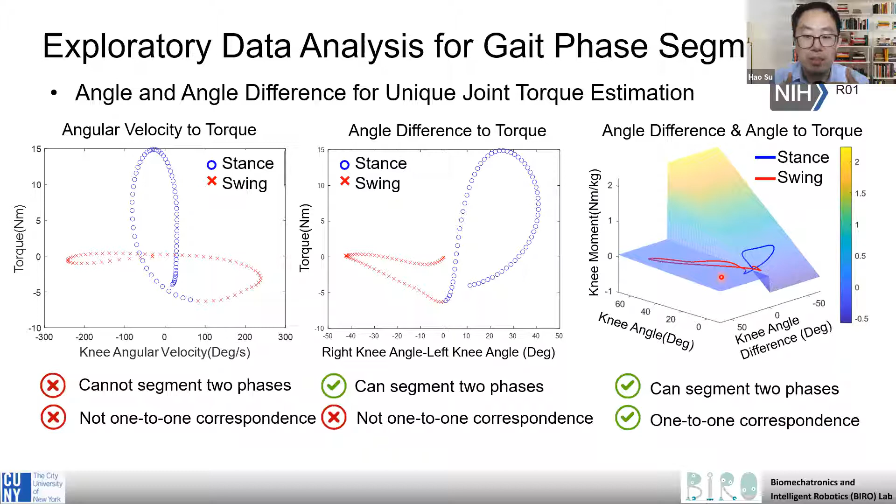We used the joint angle and angle difference to estimate the biological torque. It can match the data fairly well, but we found that there's still a discrete gap between those 2 phases. To overcome this discrete limitation, we came up with a very simple solution.

We use a smooth function, in this case a sigmoid function, readily used in neural networks research, to linearly combine the 2 stiffness modes. The blue one is stance phase data, and the red one is the swing phase data. We can blend those 2 modes by the contribution of high stiffness torque and low stiffness torque. By adding them together, we can generate estimated torque. So this is actually a very simple way to use sensor data to estimate joint torque.

But it's not trivial to figure out the stance phase and the swing phase using our wearable inertial measurement unit sensors, IMU sensors. So we figured out a nonlinear optimization method to identify the optimal hyperplane to separate those two different states.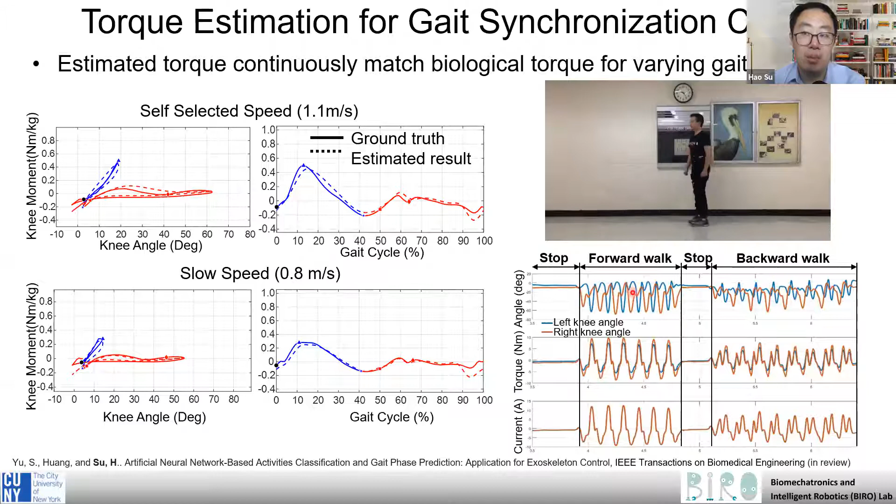And also, this kind of estimation and the gait synchronization method can work well for low speed, high speed, and self-selected, kind of a medium level speed. So it's a really practical and simple solution that can estimate the joint torque continuously for many locomotion activities, from forward walking, a stop, and backward walking.

We further developed a robust torque estimation controller for multimodal locomotion. Versatile control for multiple activities is considered a grand challenge in wearable robots, and most research is primarily focusing on walking assistance. Our controller can smoothly assist loaded walking, jumping, and squatting without using activity classification. These are discrete solutions.

More importantly, we have obtained some really promising results that our lightweight, in this case, knee exoskeleton, one single knee exoskeleton, can assist loaded walking, and it can also augment human performance to help people jump 12% higher, and also can increase by 50% the maximum number of squats for the able-bodied population.

As a summary, our research investigates the fundamental limitations of soft robots to tackle biomedical challenges. We believe that soft wearable robots can be designed as untethered with high force. In terms of the engineering impact, we think this physics-informed design can create lightweight and some new actuation paradigms. And also in terms of impact on scientific discovery, we developed some optimization-based controllers to provide versatile assistance to understand human-robot interaction.

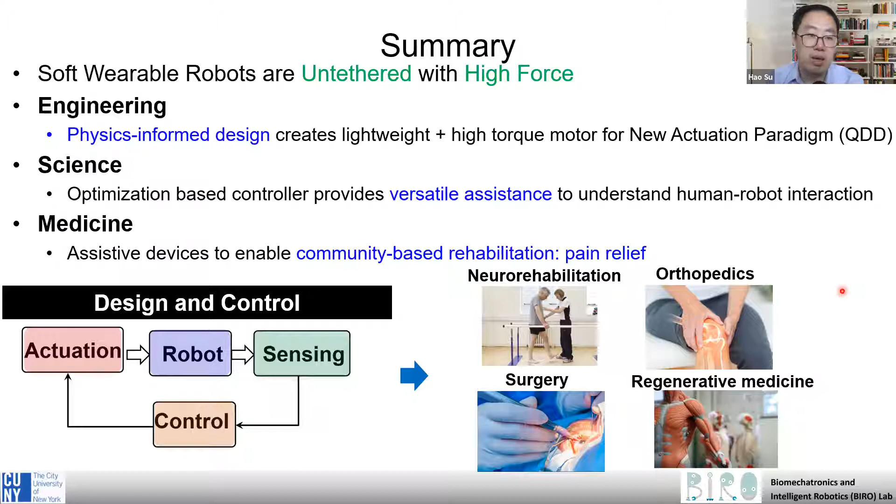And these powered robotic devices could be useful assistive tools to enable community-based rehabilitation. For example, as a device to reduce pain. So it can be used for neurorehabilitation and orthopedic applications. I think overall, those enabling technologies, including motor and sensor technology, can also be used for other biomedical applications, including surgery and even regenerative medicine.

In terms of our future research, I envision exploring two future projects. The first is a biomechanical study of this assistive robot to create new research areas. For example, we want to understand the efficacy of these robots for a broader population, for people with knee osteoarthritis and also cerebral palsy. And we also think maybe the next big thing in wearable robots is neuro robots. And we are working on this robotic hip prosthesis.

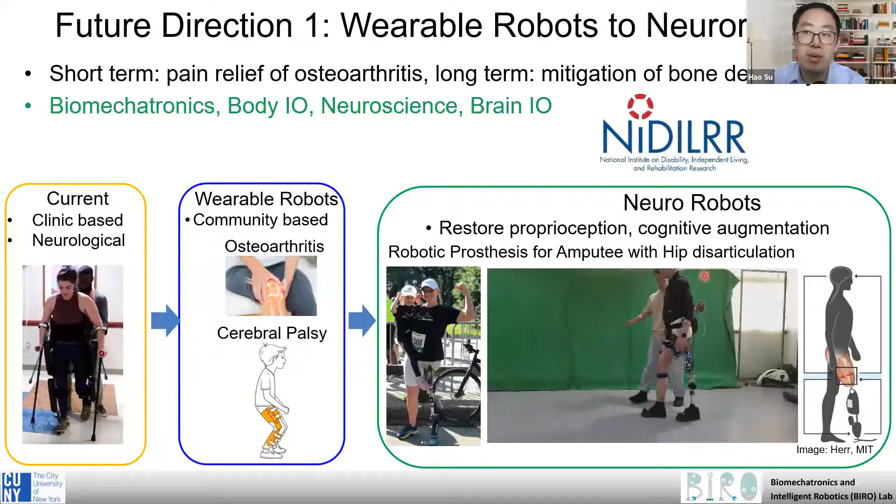Hip prosthesis research is very limited. Most of the research focuses on the ankle joint, or some focus on the knee joint. Here it's a very unique hip joint powered robotic prosthesis. And we want to have a better understanding about how to restore proprioception and cognitive augmentation for the amputee population.

Another area, I think, is physics-informed learning with application to wearable robots. In our lab, we also designed this soft back exoskeleton. It's very unique because for the back joint, we need to reduce 3 forces along the muscle and the spine, right? It's very unique. It's one robot. We want to minimize 3 forces. And by leveraging this platform, we are also working on some mechanics-informed neural network design solutions, like Lagrangian neural network based models.

In addition to research, I'm also very committed to robotics education. My goal is to develop affordable robot toolkits to lower the barrier to learning robotics. And we have an open source robot kit, which can be found on this website, and it has been used for more than 20 student projects at my university.

In the end, we truly believe that soft robots could be used for translational medicine to address unmet clinical needs in rehabilitation and also surgery, another research area in my lab, to augment humans, like surgeons, cardiologists, physical therapists, able-bodied individuals, and also people with disabilities. That is the end of my presentation. Thanks for your time. Thank you.

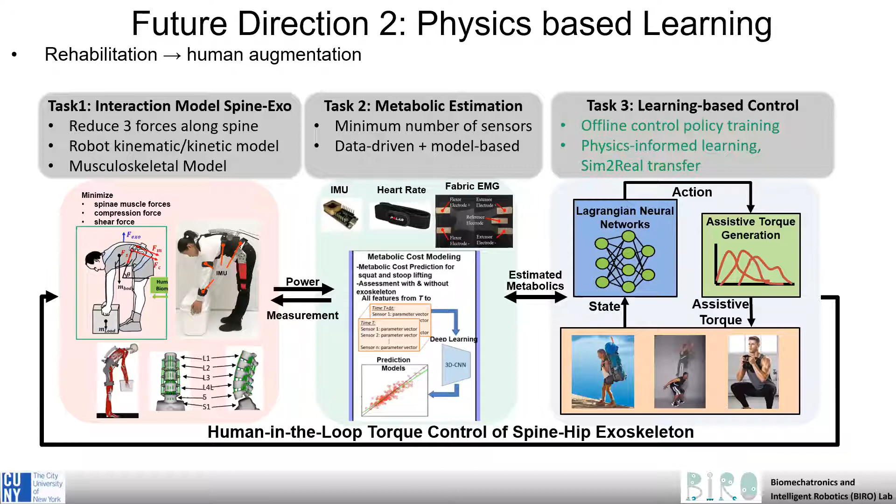Yes, I have a question. Go ahead. I was interested when you spoke about the backdrivability of your soft robot. I was wondering, how do you measure the backdrivability? Are there any metrics?

Yeah. So we use the torque sensor to measure the backdrivability for this cable-driven knee exoskeleton. There's a torque sensor mounted on the knee joint. So, for example, you can use your hand or some other tools to apply some force to the actuator, and we can measure the torque through the torque sensor.

Yeah, does this answer your question? Yes, thank you. Yeah. Any other questions?

Dr. Su, since we're waiting for other people to be brave enough to ask questions, this is a really interesting talk, and I'm excited to see the directions this can take. The students have a competition that they're talking about. Can you provide any strategies as the best way of finding or innovating in this particular area? You mentioned you've done a lot of innovation in your space. What would be a good guideline or suggestions for the students to be able to apply some of the things that you've talked about?

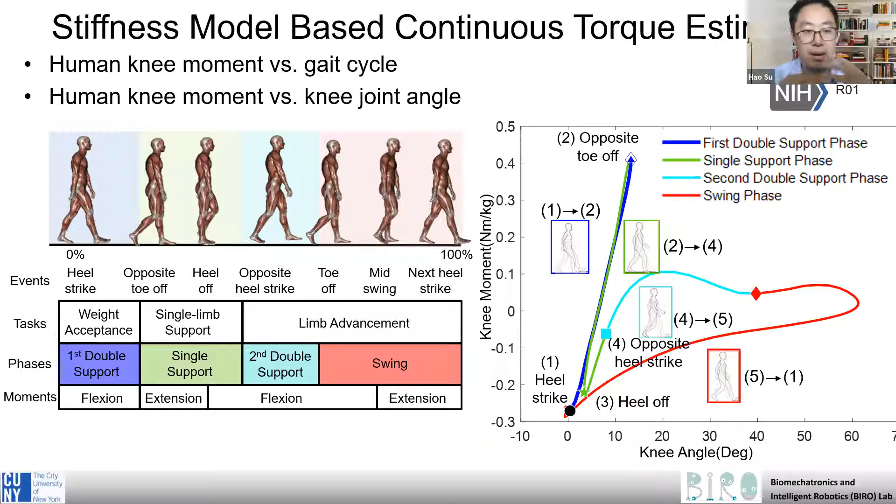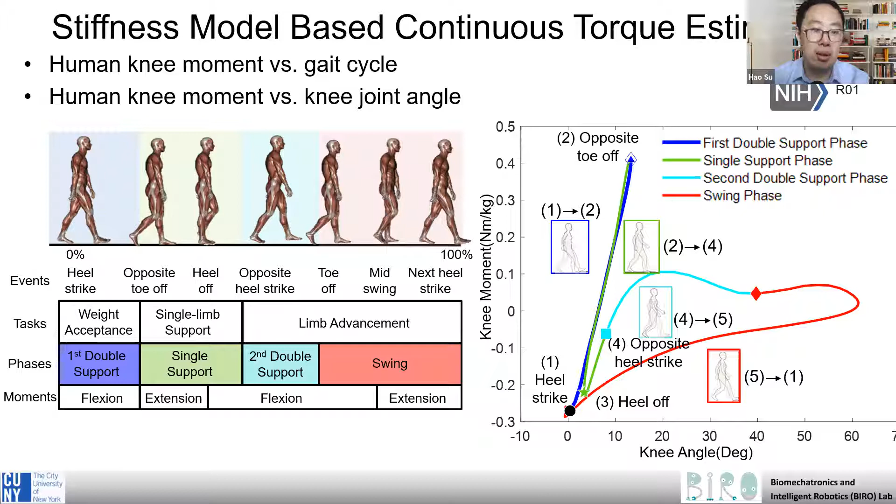Yeah, thank you for asking that, that's a good question. I think some tentative idea could be, when you think about some wearable or soft robot application, think about what joint you want to assist, right? There are many joints that could be helpful. For the lower limb, in our case, we primarily focus on the knee joint and the hip joint, because the early exoskeleton research primarily focused on the ankle joint because it generates high power.

But if you think about the hip joint, it doesn't have this kind of spike profile of the power, but the hip joint also generates a lot of overall energy, right? It's a little bit smoother in the torque profile, but the overall energy generated by the hip is also significant. So I think one challenge is to think of the joints from the biomechanics perspective.

For example, many people think the knee joint is not super useful, but if you think about stair climbing or people with disability, the knee joint tends to be a very important joint, because for level ground walking, the knee joint is like a damper. It doesn't really generate much positive energy, so people don't consider this joint as much as the ankle joint. So overall, the ankle joint has been well studied, then the hip joint, and the third is the knee joint. Maybe you can think about different applications based on the different joints. That's something that can be considered for the competition.

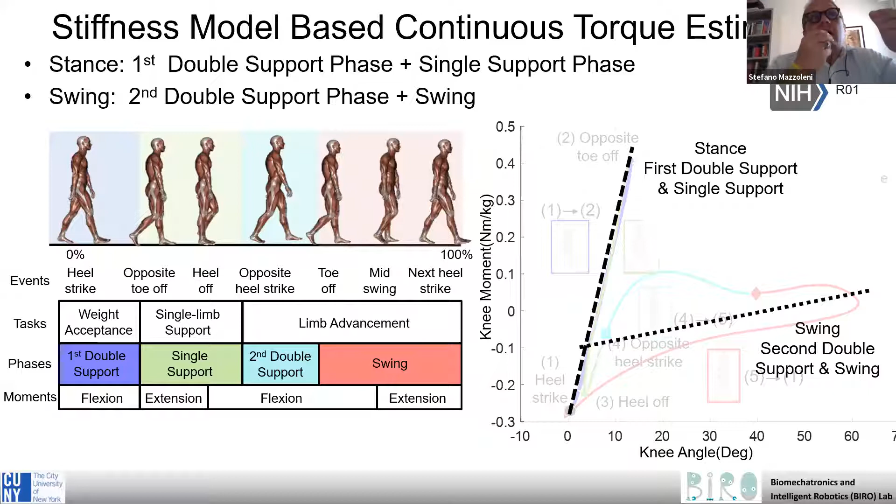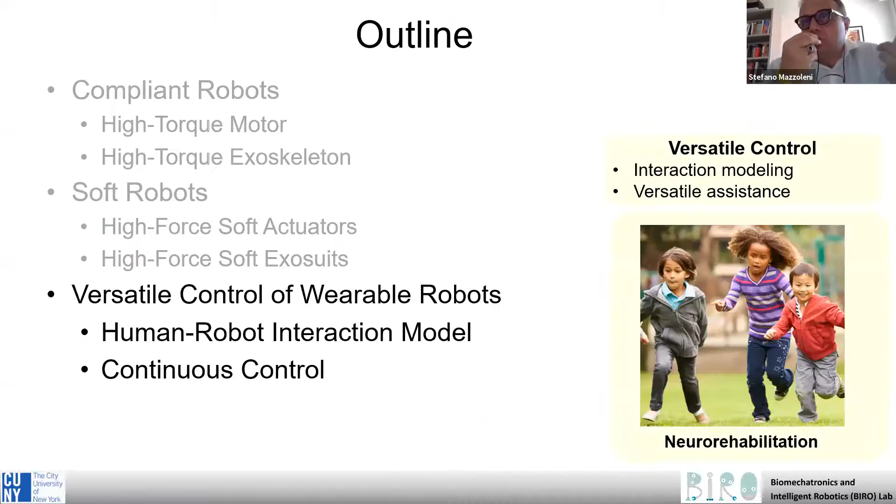Because we are aiming also to diffuse these technologies in the hospital, rehabilitation center, and when possible, private purchase. So my question is, what about affordability of robotics in this new revolution, in this breakthrough provided by soft technologies? Thank you so much.

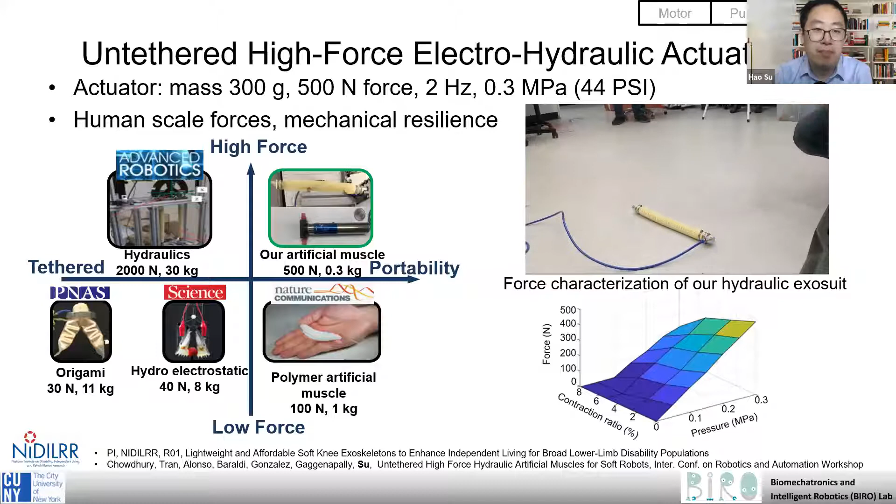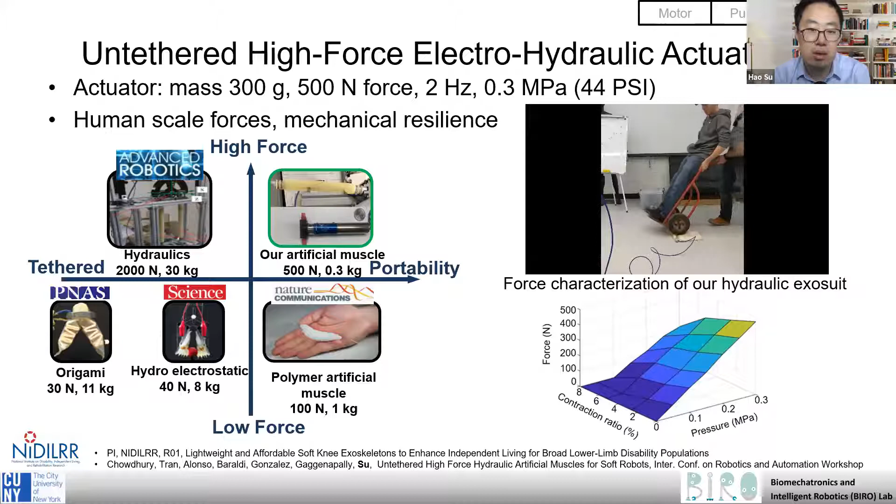Yeah, that's a really, really good question. I think currently one key barrier for the acceptance of exoskeletons is the cost, right? Generally, for example, a single joint exoskeleton for the knee joint is roughly at least 60 to 70K US dollars, right? So it's pretty expensive.

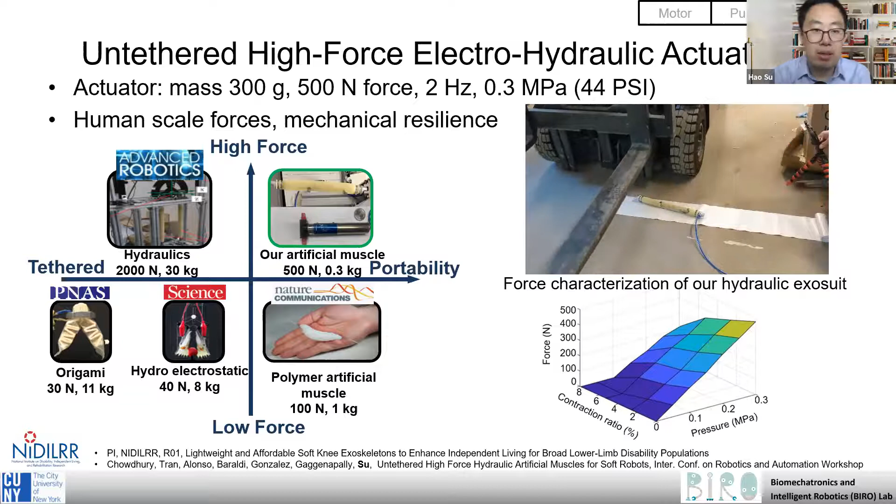I think soft robots offer some solution to reduce the cost, because when I talk about this kind of soft, hydraulic-based solution, I think this is really cool, not only because it's soft, but also because it can potentially reduce the overall system cost. Because we don't need a lot of high precision machinery, like gears and motors for the traditional rigid robot. I think from component technology, it can significantly reduce the cost, right?

But I think we certainly need to have better understanding of how significantly we can reduce the cost, and better quantify this cost reduction. And certainly you can see here there are some components, for example the motors, the pump, in our case, that are still not very cheap, even if it's softer. I think we also need to think about some kind of motor pump to further reduce the cost.

I think overall, soft robots can reduce the cost, but just a little, because they still have some rigid components, like a motor. Can we further reduce cost? The good news is in rigid robots, like the quasi direct drive, people are using drone motors. Those motors are cheap, actually about $100 if you only think of the motor itself. That's why in my lab, we are also working on the electronics, the motor driver, so we can further reduce the cost from the motor and electronics.